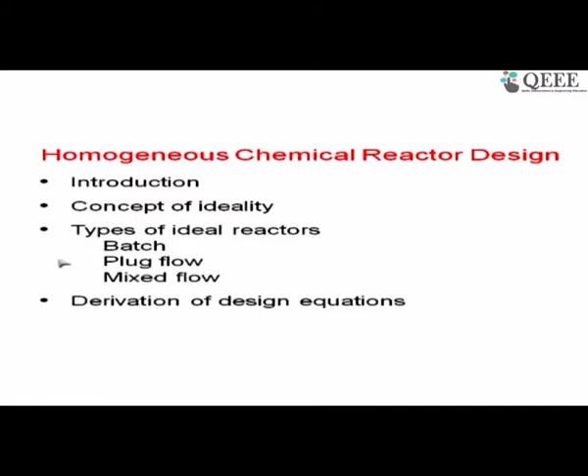Introduction first, and we also have three ideal reactors. After understanding the ideal, what is the ideality, and then the derivation of the equations, and later we will also try to solve some problems. Okay, so now.

To start with, I would like to ask this question: what do we do as chemical engineers? We enhance the quality of this planet. How do you do this? What do you mean by enhancing the quality of the planet?

Enhancing the quality of the planet means your daily life is much better once the chemical engineers start supplying the materials. For example, early morning you have toothpaste, toothbrush, and also soaps, and the books what you are going to use, the dress what you have, textiles. Textiles is not 100% cotton, but most of the textile, the dress what you are using, some part is plastic. So polymers and all that.

That's why our quality of life is increased because of various chemicals produced by chemical engineers. For example, petrol, when you want to come by your two-wheeler, or your car, or even cycle, where the tubes are made by chemical engineers. So we increase the quality of life on this planet through medicines, through cosmetics, through your textile dress, and we now have beautiful shoes like Reebok shoes or Nike shoes. All these are produced by chemical engineers.

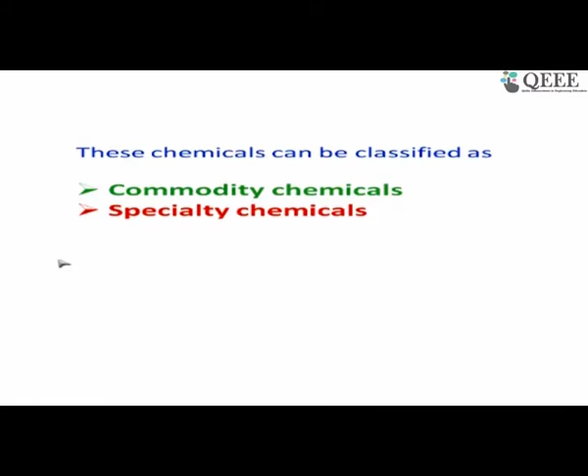Now if you see all those chemicals what we are talking, these chemicals can be split or divided into two categories: commodity chemicals and specialty chemicals. I think most of you would have completed this course called chemical technology. In chemical technology course, we teach you how to produce various chemicals. So in chemical technology, we can divide those chemicals as commodity chemicals and specialty chemicals.

Commodity chemicals are relatively simple molecules, like for example sulfuric acid, made by chemical transformations on a massive scale, producing at the lowest possible cost. The cost of production, the cost of the chemical is cheap. We produce in large quantities. These are also called bulk chemicals, bulk in large scale, and that is why probably the cost is reduced.

And we have specialty chemicals, where the volume is very small, but the cost is very high. This already you have seen. Those who are using some kind of cosmetics and deodorants and all that, you may have only 10 ml of deodorant or the sprays, but that may be costing 200-300 rupees. It may be 10 ml or 20 ml or 30 ml. So this kind of low volume but very costly chemicals are called specialty chemicals.

Like for example, drugs, injections. Sometimes an injection, a life-saving injection, may be only 3 milliliters, a very small quantity, but that may be costing 30,000, 50,000, even 1 lakh rupees. These are the specialty chemicals what we are producing. So as chemical engineers, you have to learn how to produce chemicals on a very large scale, and also you have to learn how to produce these chemicals on a very small scale.

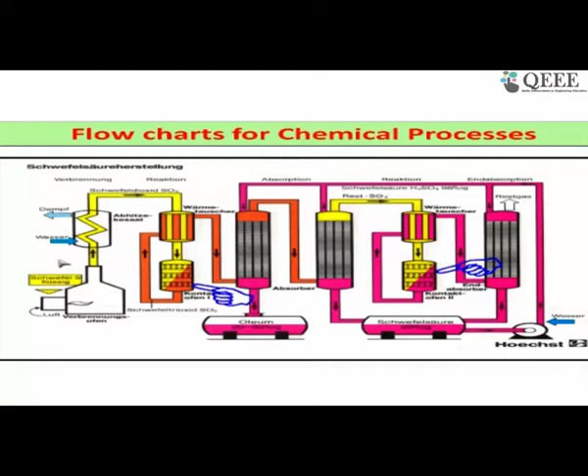For example, there is one there like this. That is one of the reactors. We call that a packed bed reactor. This is a sulfuric acid plant.

Of course, I am sorry it is in the German language, but anyway it does not matter. How do you produce sulfuric acid? Sulfuric acid is produced by taking sulfur first and then oxidizing that. Sulfur plus oxygen gives us sulfur dioxide. Now this sulfur dioxide is converted to sulfur trioxide. Again the reaction is SO2 plus half O2 giving me SO3.

But the difference now is sulfur is burnt in oxygen to give sulfur dioxide, while sulfur dioxide to sulfur trioxide is a catalytic reaction. Both are chemical reactions. The first one is sulfur plus O2 giving us SO2. The second reaction is SO2 plus half O2 giving us SO3, using a catalyst, and I am sure you may know what this catalyst is. This catalyst is vanadium pentoxide.

So now the design for converting SO2 to SO3 using O2 is different compared to simply burning sulfur in a reactor. That is also a chemical reactor, and this is also a chemical reactor.

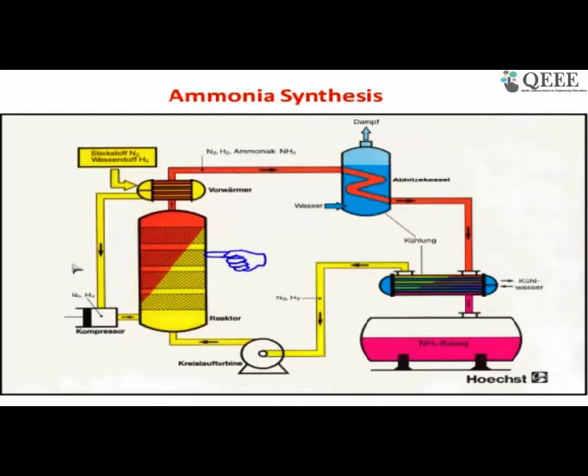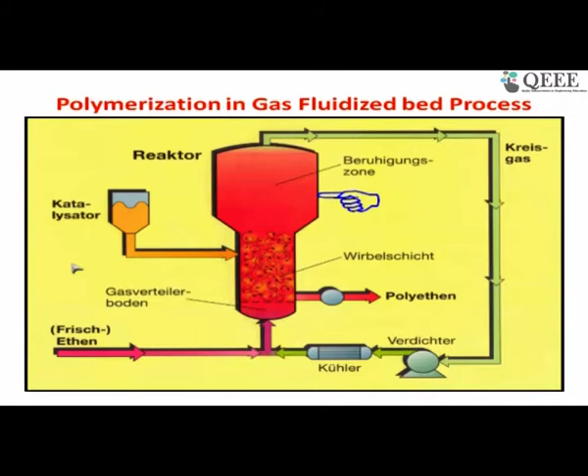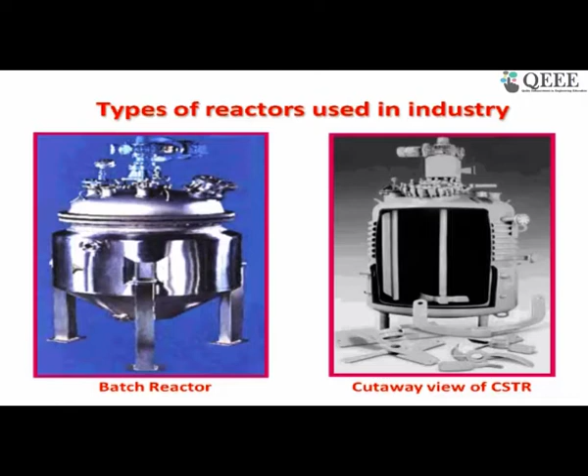Now these are typical photographs of reactors. The first one is the batch reactor, and the other one is what we call CSTR, that is continuously stirred tank reactor. These are used very widely in industry, particularly for liquid phase reactions. Only if you have a liquid reaction taking place.

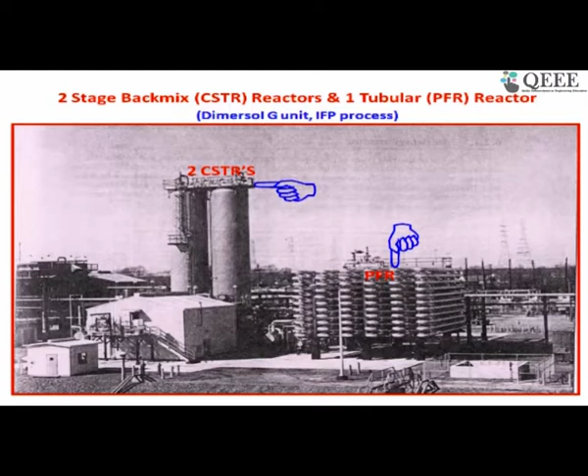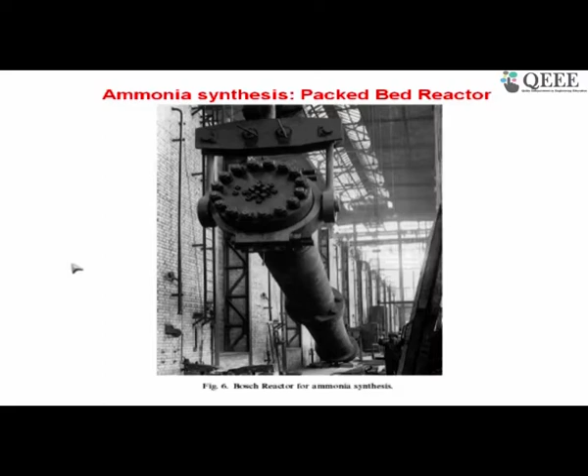This is the ammonia reactor. So this information I am taking from Levenspiel. Normally I follow the Levenspiel book, which is one of the excellent books. I think most of your teachers also will know about this book, right? So follow this book and understand it. There are many other books, but this is very popular. The reason is the subject is explained in a beautiful, very simple manner. So I follow this book, and that's why I have taken all these pictures I am showing you from this book.

So if you have any doubts, you can go to that book and try to find out. If you are not able to understand, you can ask your teachers. Still, if you are not able to get satisfactory answers, you can try me. I may give or may not give an answer, because none of us knows 100% of everything. But we will attempt to definitely address it if it is a very good question. So any question you can ask, it's not that only very good questions you have to ask.

Good. So now these are the various kinds of reactors I am showing here. Those are all catalytic reactors, because there you can see some kind of solid particles, and most of the time when we are talking about catalytic reactions, they involve solid particles. So that is the reason why all those things are solid. For example, the first one is a packed bed reactor, and B also is a packed bed reactor.

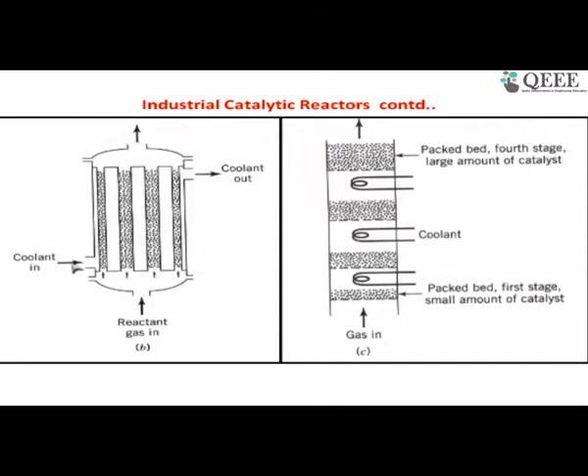But here is the problem — I hope you know what a catalytic reaction is, and there are also what are called non-catalytic reactions. For example, carbon burning, carbon plus oxygen giving carbon dioxide, is a non-catalytic reaction. I hope you know the definition of catalyst: a catalyst is a substance that will only participate in the reaction but not react itself. It will not change its composition and will not disappear. It will be there all the time if there is no deactivation. That is the definition of a catalyst, and most of the time we have only solid catalysts.

So this covers only catalytic reactors, and non-catalytic reactors can also be designed the same way as catalytic reactors, with slight modification.

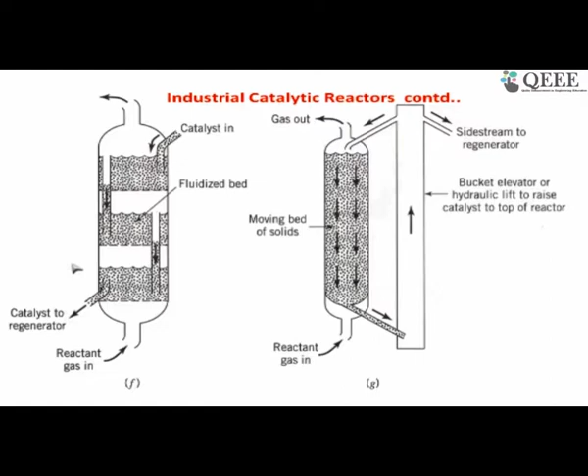What I am giving you is a small portion of reactor design, used for catalytic reactions, non-catalytic reactions, and also homogeneous reactions. These are gas, liquid, solid reactions - gas is one reactant, liquid is one reactant, and solid can be a catalyst. There are 3 phases now. These are the various designs useful for the reactions. You may be thinking I am showing too many things, but it is only to appreciate that there are so many varieties of reactors.

That is why I am showing you that. You do not have to remember all that, but it is better to know that there are various kinds of reactors available in the chemical industry. So now I can show you some more.

Gas bubbles, as you would see in aquariums in shopping malls or in your own house when you put fish and bubble oxygen because fish also need oxygen - what you see there is bubbles coming. In chemical reaction engineering, those bubbles are one reactant and liquid is another reactant. The gas in the bubble has to react with the liquid, and how the reaction takes place, what steps are required for the gas to go into the liquid and then react, is the study of chemical reaction engineering.

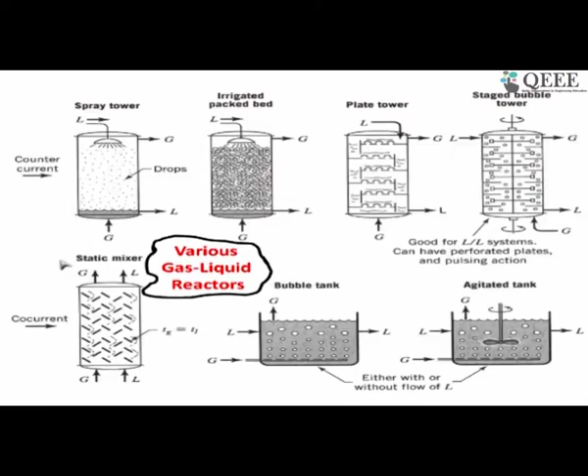That is why you have to remember that because we have gas, liquid, and solid phases, combinations of all these phases will give us lots of information and lots of varieties of reactor designs. I don't say the design is simple, but reactors, right? So that is what I was trying to show you here, and some more.

By the way, the title 'chemical reaction engineering' itself is one of the wonderful titles, because you are engineering a chemical reaction. That is the difference between a chemist and a chemical engineer. A chemist will not engineer a chemical reaction.

He will simply conduct a chemical reaction in a very small test tube. He will take maybe 5 grams, sometimes 1 gram of reactant, put it into the test tube, go to the Bunsen burner, and put the test tube on the burner. Why? Because unless you increase the temperature, the reaction doesn't take place. So that is why you go to the Bunsen burner and then shake it - that shaking is to make the reaction mixture homogeneous. That's all, and the reaction takes place. He gets a product, goes to some analytical equipment like liquid chromatograph, gas chromatograph, or simply uses a titration method, and finally says yes, I got the product. What is the total amount of product? Not more than 2 or 3 grams.

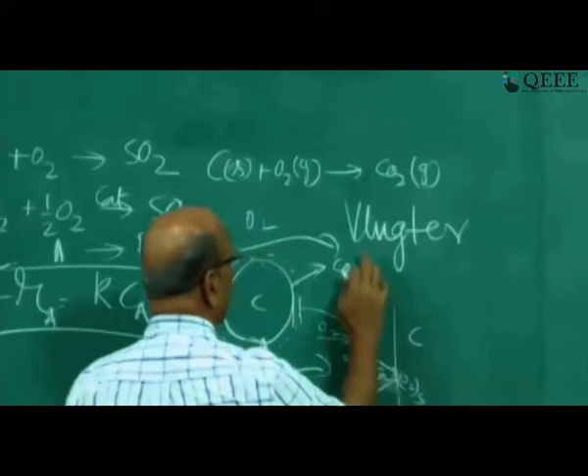It was beautifully coined by a person called Vlugter - I hope that's the name, Vlugter. He is the person who introduced the name chemical reaction engineering, and immediately that idea was taken by Levenspiel, who used the same name as his textbook title, Chemical Reaction Engineering. You are engineering a chemical reaction.

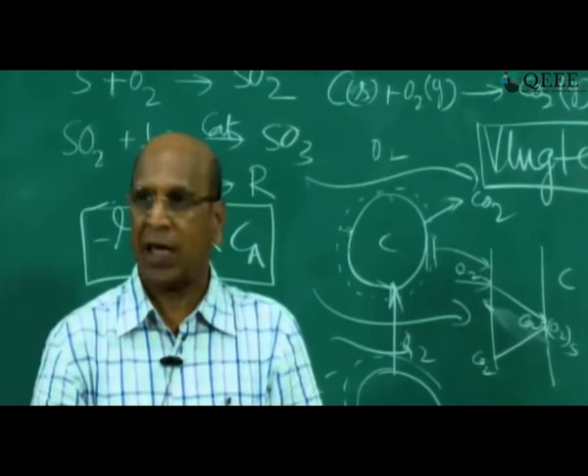I am sure most of you would have studied mass transfer, where you use Fick's law of diffusion. Here also we use Fick's law, or otherwise there is another law of mass transfer, the convective mass transfer, because it is flowing and then coming there - it is not simply diffusing. So that is the reason we have this mass transfer step, which comes under the physical step. That is the meaning of the physical step in kinetics. The chemical step is the actual chemical reaction.

So now let me say a few words about input. What do you mean by this input? I told you that when producing sulfuric acid - that is the flow chart I showed you first - let me go back and show you. When we were talking about the sulfuric acid plant, I told you someone has to specify that you produce 5,000 tons per day of sulfuric acid. I have also given here the steps required for sulfuric acid: this is SO3, and now this SO3 plus H2O giving me H2SO4.

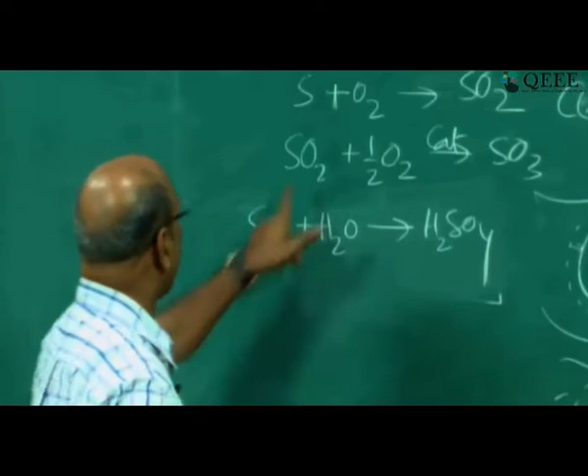This is H2SO4. So now what we have to do is, what is the input? How much of SO3 I have to send and how much of H2O I have to send, that is the input. If I am talking about SO2 plus half O2, how much SO2 I have to send, because this is the reactor. And when I am talking about this reactor, how much of sulfur I have to take and how much of oxygen I have to take. That is the input in that picture.

So that is the reason why we have this input, which is known to you. Input is the simplest one to get. I will give you another example.

Let us say that during rainy season many people may get fever. Throughout India now we have rains going on, so they may get fever, and you have to produce more fever drugs, fever medicines. People quickly count that there are so many patients, maybe 1 lakh patients. Each patient has to take 500 milligrams per day of the tablets. So now you can calculate how many milligrams for 1 lakh people, and you go to the stoichiometric equation and find out from the stoichiometry what is the reactant that is possible.

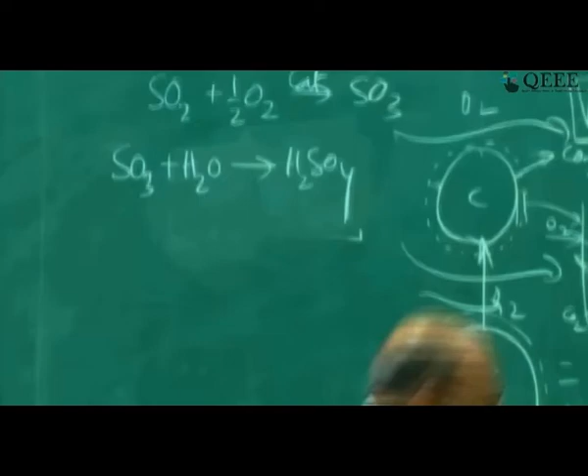This is what exactly you studied in your process calculations course. Some universities may call this process calculations course as material and energy balances course. In that course itself we tell you how to calculate the reactant if the product is given. The product here is sulfuric acid, H2SO4. So how much of SO3 is required? And to have this SO3, how much sulfur dioxide is required? And to have this SO2, how much sulfur is required? These are all the calculations you do in your process calculations.

You see how beautifully all the subjects fit into the entire chemical engineering curriculum, and everything starts with the reactor. So reactor is the first equipment that should be designed in actual industry, but this is the one we teach normally at the end, maybe in 3rd year, before you close. The reason is you have to understand fluid mechanics, thermodynamics, process calculations and heat transfer, all these subjects are required for the design of reactor. That is why we start with process calculations, then thermodynamics, fluid mechanics, heat transfer, mass transfer, and then go to chemical reaction engineering. I think now you can get the overall picture of the entire syllabus, even though in industry the reactor is the starting equipment. That's all, period.

Good, okay, so now this kinetics part. Input is easily seen for us because we can calculate knowing that you have to produce maybe 1000 tons per day or 2000 tons per day. So now input is already known in that output equals input equation. Input I know, kinetics now you have to find out.

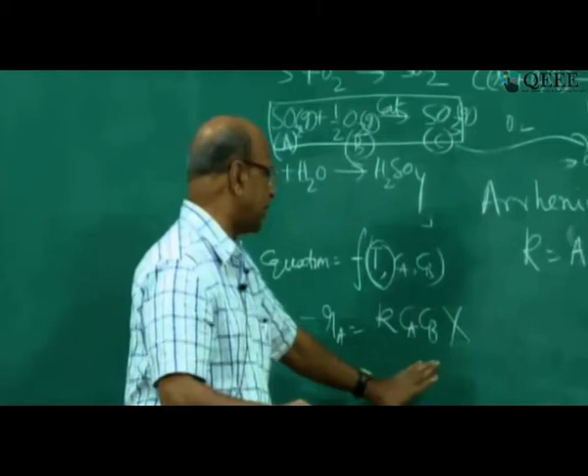Once you understand the concept, then it is only a mathematical exercise. That's why you have math 1, math 2, math 3, math 4 and so on in your BTech curriculum - so many mathematics courses, that is the reason. So mathematics will come automatically later, but before that, to teach the concept, we take the simplest reaction, maybe first order, maybe second order - and this is what we call second order.

So now, when we talk about the second part - in that equation, in that box, output equals input, kinetics and contacting. Input I have already explained, that comes from the material balance and the actual demand, how much you have to produce. And kinetics comes from the rate equation, which you have to develop.

And developing the kinetic expression itself is a big thing. I think your teachers will tell you once these lectures are completed, your teacher will start - or some of the teachers would have already started, since your college would have started earlier. So that kinetic part, some of you may be knowing and some of you may not be knowing.

So what I request of all the teachers is to give that connection between kinetics and the input and contacting. I will explain how these three pieces of information - input, kinetics, and contacting - together give the final expression for the design. My portion is only that contacting part.

Once you take the contacting part, how do I design? But before that, what we require is kinetics and input. This is what I would like to request all the teachers to give - that connection, so that the students are not lost. They hear a professor from IIT talk, but they don't know where to put that information in their overall reaction engineering problems, right?

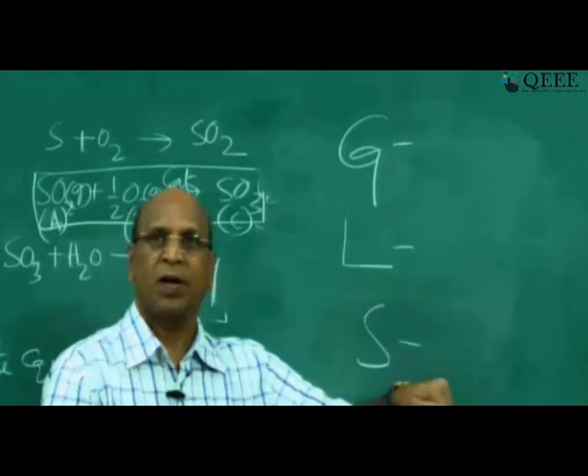Now there are combinations. When you have two reactants, I may have gas and liquid, liquid and solid, solid and gas. I may have solid and solid also, liquid and liquid also. But when I say liquid and liquid, both are not miscible - like kerosene, if you put oil in water, oil is separate and water is separate, it will float depending on the density. So that is also a two-phase liquid phase reaction.

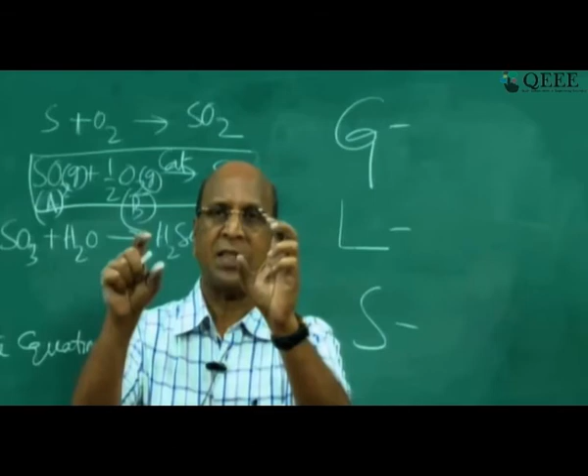Normally what I do when I teach my students is give an exercise for each of the heterogeneous reaction categories. There are 6 categories - gas-liquid, gas-solid, etc. In each one, 5 industrial examples of chemical reactions. Like if you take gas-solid, there are many.

One gas-solid reaction example is coal combustion, coal gasification, or iron ore reduction. Iron ore is also a metallurgical reaction, but it's a gas-solid non-catalytic reaction. This is a very good exercise. I request all faculty members to give this exercise, at least 3 to 5 examples in each category. The student has to go to the library, collect that information, so that he or she will feel that yes, there are so many kinds of chemical reactions possible.

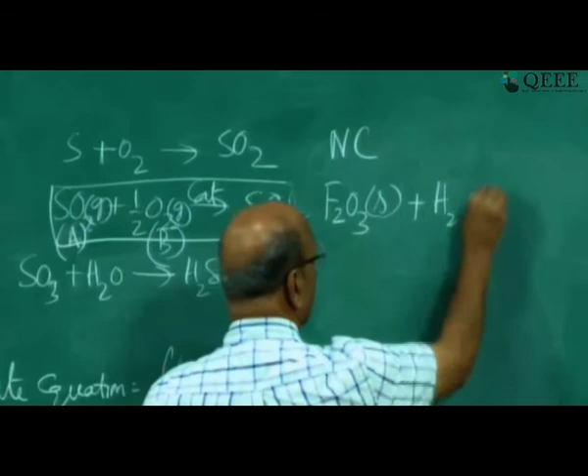Good. So I have also told you there are catalytic reactions and non-catalytic reactions. The difference, I think I will give you an example. Examples are always better. So if I give you a non-catalytic example, I have Fe2O3 solid plus H2 gas giving me Fe solid plus H2O gas.

Why is this a non-catalytic reaction? The reason is Fe2O3 after the reaction is not Fe2O3, it is Fe, a different compound, right? This is a solid, this is a gas, and we call this a gas-solid non-catalytic reaction because there is no catalyst here.

Now let us see: I have H2 gas plus N2 gas plus Fe, this is solid. So now I am writing below: this is NH3 gas, this is ammonia, and the catalyst is iron, plus this is Fe solid. So when I balance, this will be 3, this will be 2. So this is the balance, but now you see Fe started as Fe because it is a catalyst, and after the reaction is over, it is still a catalyst, still Fe.

That is the difference. This is called a gas-solid catalytic reaction, and this is called a non-catalytic reaction. I have not expanded on it, but this is the main difference between catalytic and non-catalytic reactions.

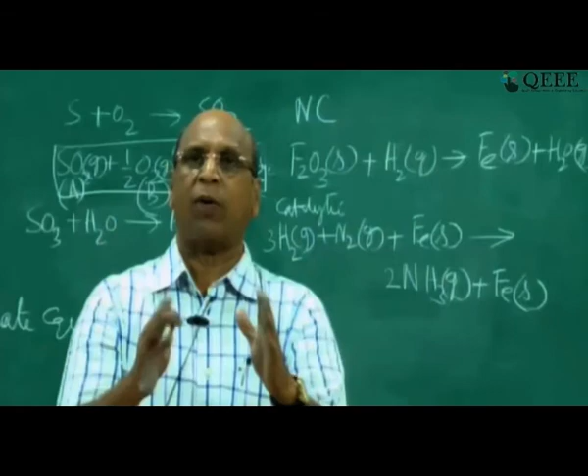So now I hope you got some idea about this. For every category here, for gas-liquid reactions if it is heterogeneous, gas-solid reactions, all categories, or in terms of homogeneous liquid and gas, you have to develop a rate expression. That rate expression is simply a rate equation as a function of temperature and concentrations, but this is for homogeneous.

This is for homogeneous. For heterogeneous, there are 2 more steps coming. This is only concentration and temperature, at high temperature. So there you have to let the mass transfer step come into picture.

Mass transfer from the gas to solid, temperature from gas to solid. You should have studied in fluid heat transfer how to calculate the heat flux through film, through gas film. Heat flux, I hope you understand flux.

Flux is any quantity per unit time per unit area. How much heat, how much energy transported per unit time, maybe per minute or per second, per meter square. That flux is required because once I know the flux, I can calculate the temperature.

So you have the normal Fourier law of heat transfer and also convective heat transfer and all that. So those equations will automatically come there with the heat transfer coefficients, thermal conductivity and mass transfer coefficients and diffusivity. And all of you also know the connection between diffusivity and mass transfer coefficient from film theory. So that is why in reaction engineering, all these subjects are also integrated. They have to be integrated, there is no choice.

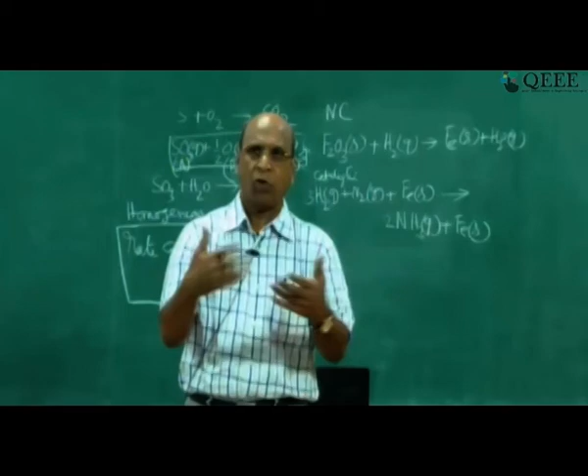So this minus RA is K into CA CB. The definition also I will show you sometime later. Normally the rate equation is expressed as moles of A converted per unit time per unit volume. Those who have completed the first introduction in your normal course would already know the definition of rate. It is very nicely given in this book, in the first chapter, what are the various kinds of rates and how do you define them.

What I want to teach now is only the homogeneous part, where the definition is - if I have A plus B going to R, then the rate minus RA is defined as minus 1 by V, dNA by dt.

This minus is for the reactants because reactant concentration is decreasing. So this is written as moles of A reacted per unit time per unit volume. Normally what we write is moles per minute, one example, per liter. So moles reacted per minute per liter of the reactor. It can be per meter cubed of the reactor, whatever you like. So that is the definition, and this simply tells that we have so many moles reacted per unit time per unit volume.

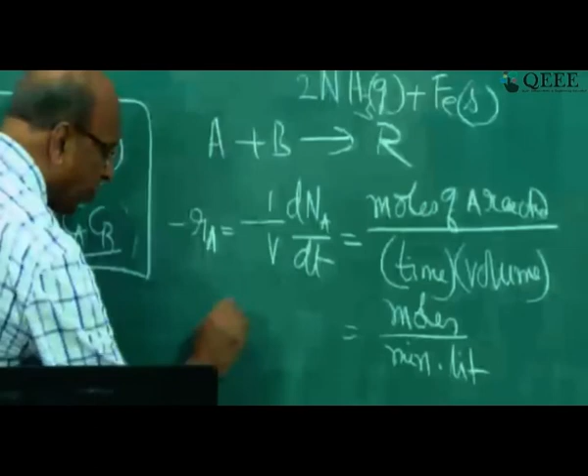Now this entire thing may be equal to a simple first order reaction, K into C. That's all. How do you get this one, K into Ca? You have to do experiments, you have to go to laboratory, you have to conduct experiments, and there are some procedures, processes, some methods to develop these rate expressions.

And that is the first part of what we normally teach in chemical reaction engineering, but I am only just giving the connection, not the details of how you actually find out the rate equation. I am sure most of you would have found this rate equation in your high school physical chemistry, maybe 11th or 12th class. You should have studied in physical chemistry laboratory to find out order of reaction. They would have given a simple example to find out what is the rate expression. That rate expression is very important for us in reactor design.

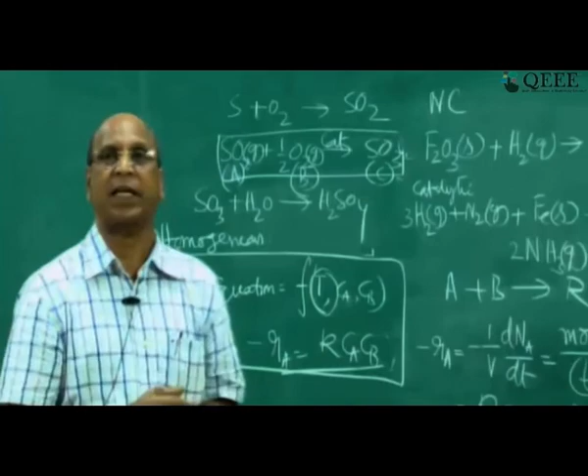Good, so now let me go back to this, what I have just written. Definition of homogeneous rate - that I can be A, that I can be even for the product. Normally what we do is, if it is a product R, then product is being formed, so it is positive. That is the convention. And when you are writing the rate expression with respect to reactants, then you have the negative, because it is decreasing with time, otherwise there is no reaction.

You take so many moles of A, so after 5 minutes, if you start with 10 moles per liter, that has to become 5 moles, 1 mole, 0.1 mole, and finally everything converted or about to convert. That is why there's a minus sign there, right. So this is a very general definition of homogeneous rate. Moles of I formed means for product, the same thing can be written as moles of I reacted for the reactants. Normally what we take there is a key reactant.

What is a key reactant? You should have studied this in high school also. A key reactant is the one which has the lowest number of moles in that stoichiometric equation.

For example, in A plus B going to R, stoichiometry tells me 1 mole of A plus 1 mole of B gives 1 mole of R. But I may take 10 moles of A and only 0.5 moles of B. Now B is the key reactant because that is the lowest quantity. After 0.5 moles of B is reacted, the reaction cannot take place even though I have a lot of A. That is the key reactant.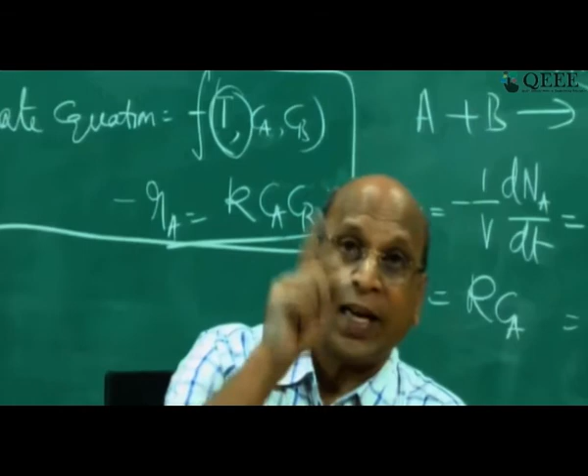So the rate expression minus RA is always for a key reactant, whichever is the limiting reactant.

I have also given just below the homogeneous rate, where the rate is expressed as moles per meter cubed per second. One term is temperature, the other is concentration dependent. Once we have the concentration dependent term, the equation can be like this: minus RA equal to K Ca to the power of A, where A is what we call the order of reaction.

Now this K can also be expanded in terms of the Arrhenius equation. I hope you remember what the Arrhenius equation is. K naught e to the power minus E by RT is the Arrhenius equation, where E represents the activation energy, K naught gives the frequency factor or pre-exponential factor, and Ca is the concentration dependent term.

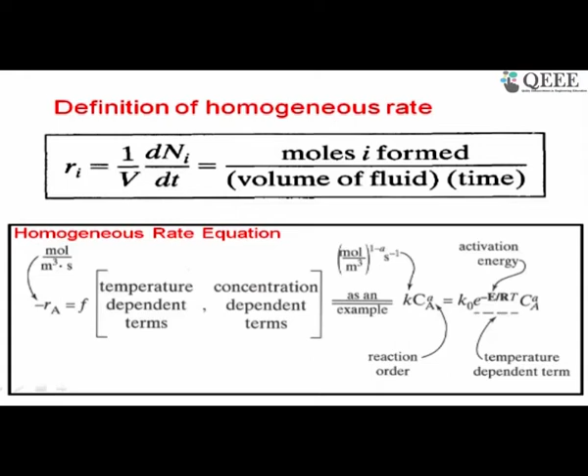So now with this combination, what kind of rate expressions are possible I have given here. If I take only A going to R, just A going to R, you can see all those equations which I have given below are possible.

That is why you have to appreciate here: if I ask you what is the order of reaction for A plus B going to R, with high school knowledge your answer would be, sir, it is a second order reaction.

If I ask you A going to R, what is the order of reaction? Your answer would immediately be, sir, that is the first order reaction. No, that is wrong. You can never tell what the order of reaction is just by looking at the stoichiometric equation. That is number one thing you have to learn in chemical reaction engineering.

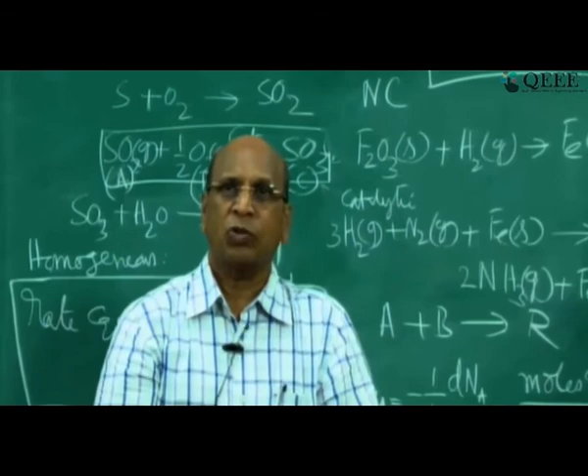It is exactly like you cannot say whether a person is good or bad by looking at their face, right. All of us know about that. So that is why even though it looks very innocent, A going to R, very simple, it may give you hell. It is not that easy to tell that this is the first order reaction.

Then what do you do? You don't have any other choice except going to the laboratory and trying to find out the actual order of reaction. There are methods, I told you. There are some reactors, and then there is some methodology to find out the order of reaction.

Once you know the order of reaction, if it is first order, then you write: this is first order reaction, my minus RA equal to K into Ca. Then you are very happy. Once you know experimentally, you have proved that this is first order reaction, then if someone asks you what is this order, you can say yes, it is first order, sir.

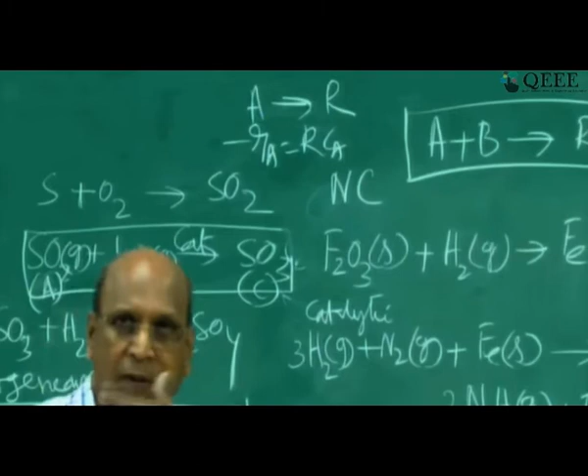How do you know? I will ask, or the other person can ask. Because you have done the experiment, sir, I have proved it with experiment, it is first order reaction. So those are called elementary reactions, where the stoichiometric coefficient and the order of reaction, the power, correspond. Those are called elementary reactions.

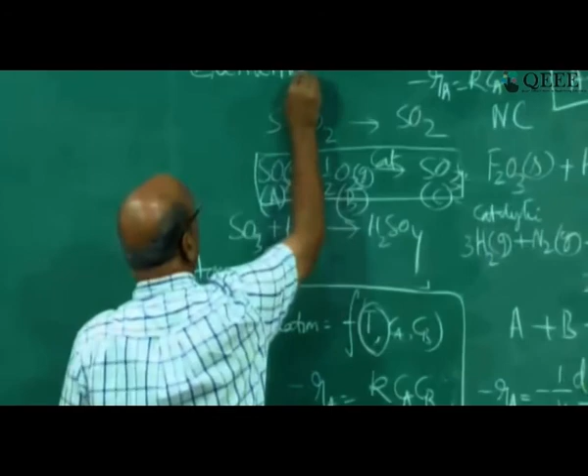And elementary reactions - I am sure your teachers would have taught you if they have already started reaction engineering course, because reactor design comes a little bit later, maybe 2 or 3 weeks later. Right? So elementary reactions, non-elementary reactions.

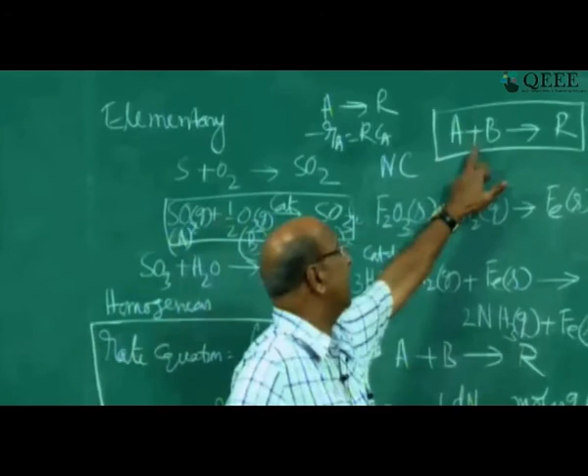Non-elementary means you can never tell what is the order of reaction by looking at the stoichiometric equation. By looking at it, if this is an elementary reaction, this is a second order reaction: A plus B going to R.

So there are so many possibilities for the reaction rate equations, and all those possibilities I have given there. The possibilities are minus Ra can be zero order reaction. If you see A going to R, it can be first order reaction, it can be second order reaction, it can simply be nth order reaction where n can be 0.5, 1.2, or 2.2, but never beyond 3.

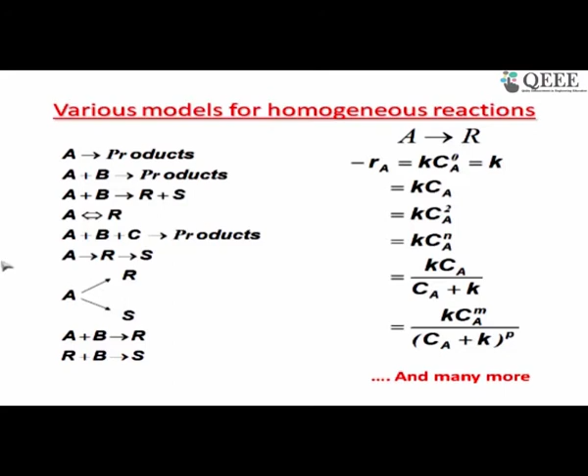So that is why you may also have KCa by Ca plus K - all combinations are possible. So please do not have a fixed idea that A going to R should only be a first order reaction. Open your mind, and then try to find out what is the order of reaction only from experiments. As chemical engineers, you can never avoid experiments, even though you want to, if you want to be in chemical engineering, particularly chemical reaction engineering.

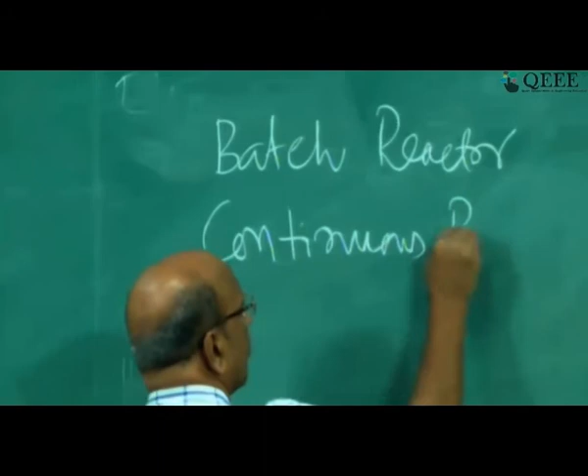But fortunately, all those wonderful pictures you have seen can be reduced to only 3 types of reactors. Only 3 types. Let me write that: the 3 types of ideal reactors will be batch reactor, and continuous reactors. In continuous reactors, you again have 2: one is plug flow reactor, the other one is mixed flow reactor.

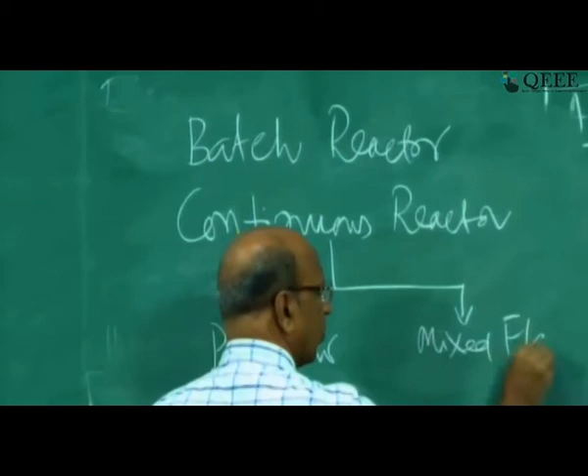So what I am going to talk about is what is a batch reactor, what is a plug flow reactor, and what is a mixed flow reactor, and how do you design it.

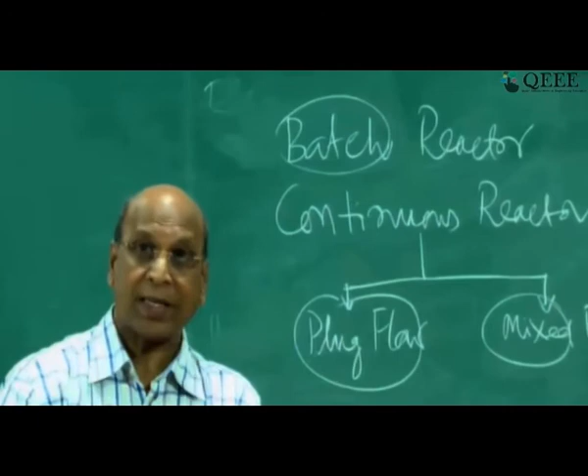This is all for either gas only, or whether you have liquid. But the equations we are going to derive will be universally acceptable even for heterogeneous reactions, absolutely no problem - same equations. But what is the difference? The difference will be in the rate equation, which will be in terms of mass transfer and heat transfer.

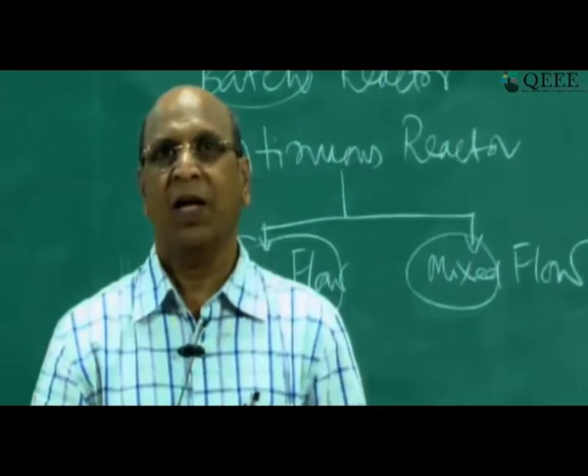Whereas in homogeneous reactions, it will be simply K into C, or any complicated equation, but you will have a concentration term and a temperature dependent term. There you have mass transfer coefficients and heat transfer coefficients - that is the extra information, but the reactor design is exactly the same as what we are going to talk about for homogeneous reactions.

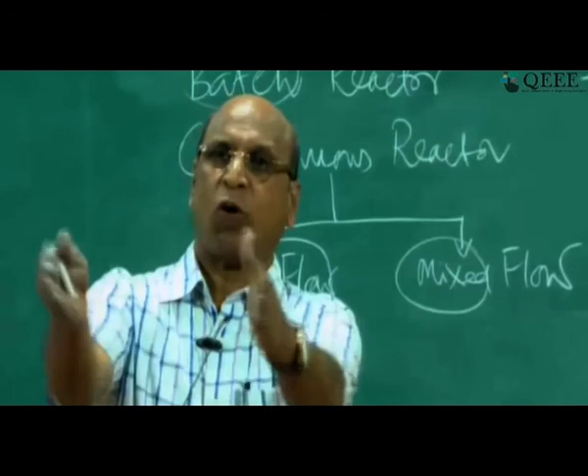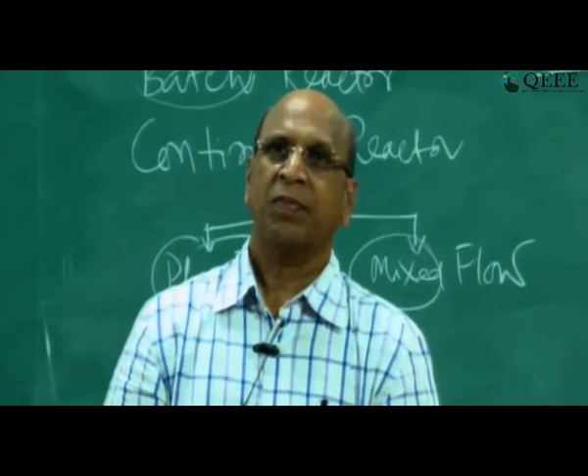Why do we use small reactors for high speed reactions? The design expression, once we derive it, you will know that.

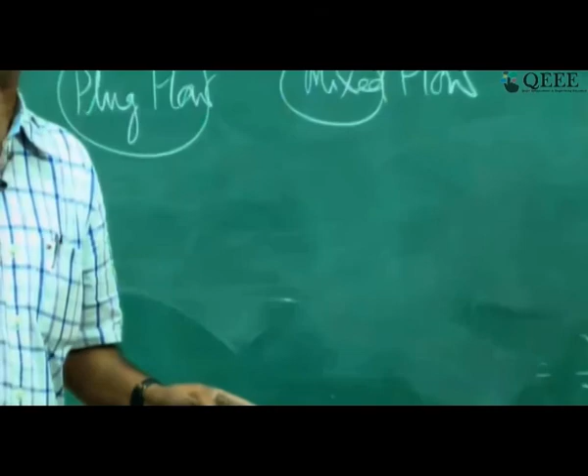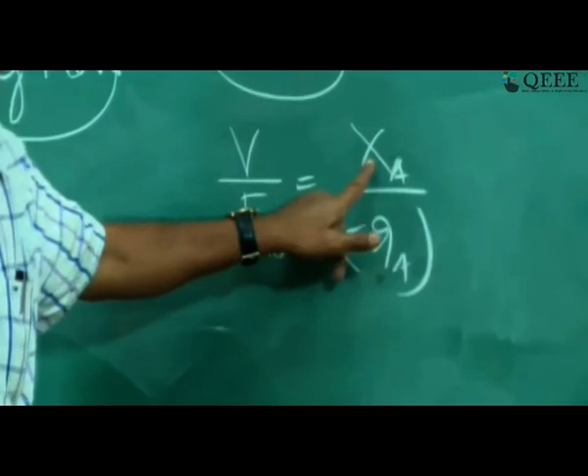Okay, I think I will just write it, even without deriving. So one of the design expressions for, let us say, this mixed flow reactor is V by Fa naught equal to Xa by minus Ra. This minus Ra is the rate equation, and this X is the conversion you want, 90% for example, and Fa naught is the amount you are sending in. Input is this, kinetics is this, and this is what you have to get - 90% conversion. To get 90% conversion, you have to calculate the volume.

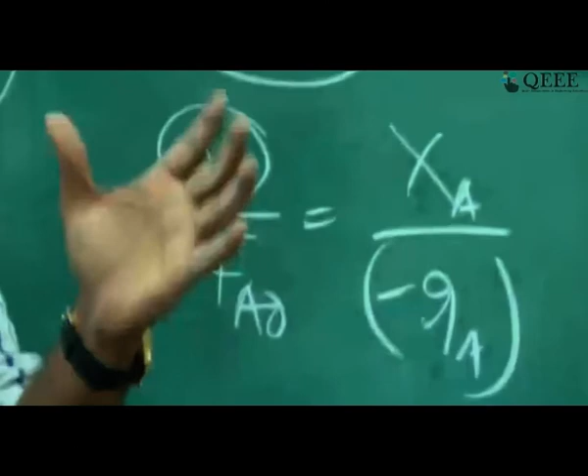So this is fixed for 90% because you want 90% conversion, Fa naught is how much you are inputting into the reactor, and now minus Ra - if minus Ra is a very large value, mathematically you are dividing by a large value so this side becomes small, and volume becomes small because Fa naught is fixed. So that is why when you have very fast reactions, the rate is very high, the volume required is small.

So when you have a large rate value, naturally you will have a small reactor. On the other hand, if this is a very slow reaction, that means you are converting 0.00001 moles per meter cube per minute, a very small quantity. So that is why you need more time or more volume for getting the same conversion. That's why volume increases. It depends on the rate, how quick it is. If you have a very fast reaction or very high rate, that's why you get a small volume.

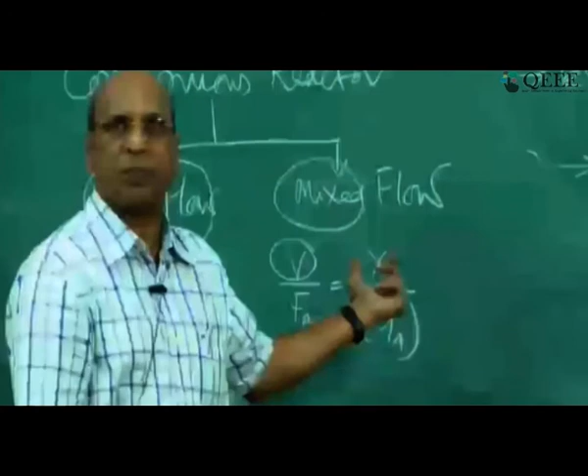And you know, for catalytic reactions, the catalytic rate is very fast compared to the normal rate. That's why you are using a catalyst, right? So when you use a catalyst, your volume may decrease a lot.

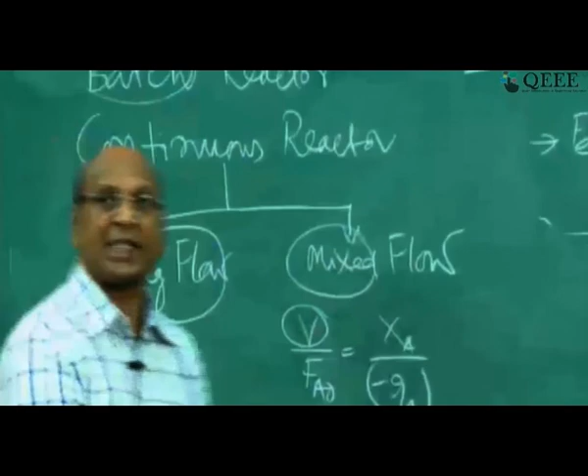And that comes from the derivation where you have this kind of equation, and whatever reactor type you take, maybe plug flow, maybe mixed flow, maybe batch reactor, in all these three the rate comes in the denominator. When the denominator is large, this side you have low values, so that's why volume becomes low or time becomes low.

Right? Understood, or do you still have some doubt? Sir, understood. Thank you, sir.

Another question: how does the shape of a reactor influence a particular reaction? In fact, there is no connection between a particular reaction and the shape of the reactor.

Absolutely, you cannot say if I have second order, you take a globe shape, and if you take first order, you take a tube shape. No, absolutely there is no connection. But when I start explaining to you what reactor design is, definitely I will tell you there are only tubular reactors and tank reactors, but why we take that shape, all that I will explain to you later. But please remove this doubt from your mind that the shape of the reactor and a particular reaction don't have any connection.

Whether you have a fluidized bed or packed bed depends on whether you have a catalyst or no catalyst. That I will explain to you later. So that is good. Is there any other question?

Okay, how to determine the frequency factor of the Arrhenius equation?

Very good. I think you have not done the physical chemistry experiment. I think you have to plot the Arrhenius equation on a semi-log sheet. See, your equation is K equal to K naught e power minus E by RT. This is the Arrhenius equation, which is valid most of the time in chemical reactions, no problem at all. So we can safely take that.

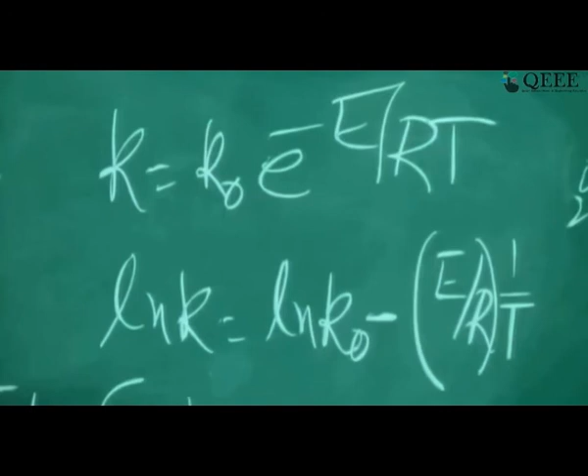So now take logarithms of this. Ln K equal to ln K naught minus E by RT. So I will take this one as E by R and this as 1 by T. So this can be plotted as ln K versus 1 by T. This is nothing but X, this is M.

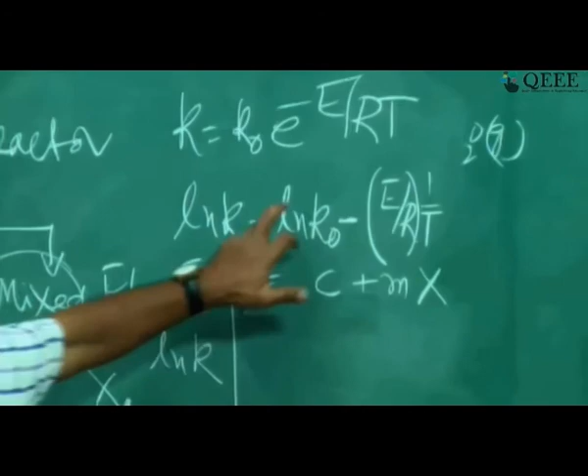This one, I am just writing plus, and then here you have C, and this is Y. I hope you recognize this equation now: Y equal to mx plus C. So we are converting this Arrhenius equation into a straight line on a semi-log graph.

So now ln K you plot against 1 by T, and you will get a line like this. So the slope m is E by R, negative slope, the minus will come anyway. And this intercept is C, which is ln K naught.

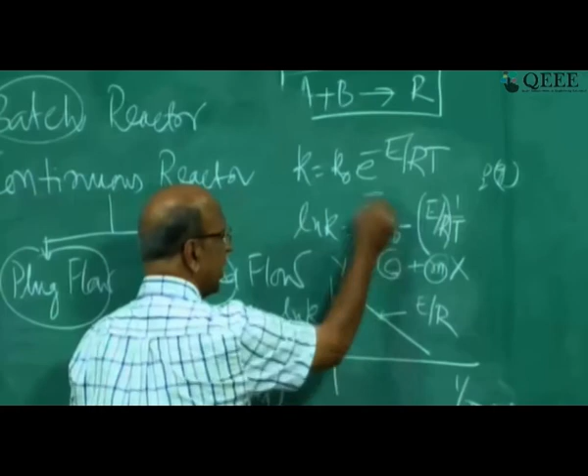This is ln K naught, from which you can calculate the frequency factor. This is how you have to do it: after taking the data for various temperatures, find the K value, and then you will get this plot.

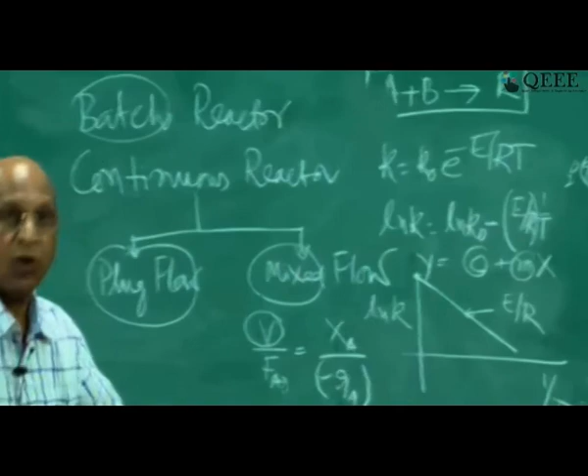I think that is a very good question. In the laboratory you do that to find out the frequency factor, and the slope will give you the activation energy, and anyway R we know, R is the gas constant. So you can happily determine that. I hope you understand that.

Okay, another question is there? Oh, BSAR, okay. BSAR has another question.

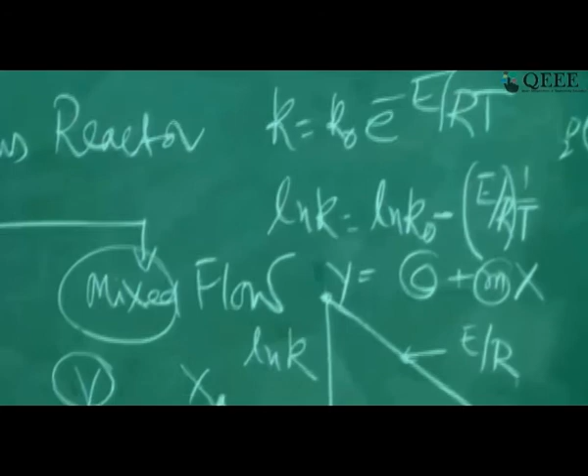When there are two separate phases, there exists a boundary layer. How do I visualize this layer and how to determine it? Yeah, again a very good question. Thank you, you are all listening and very active. Okay, so now I will give the simplest example, like you have water here.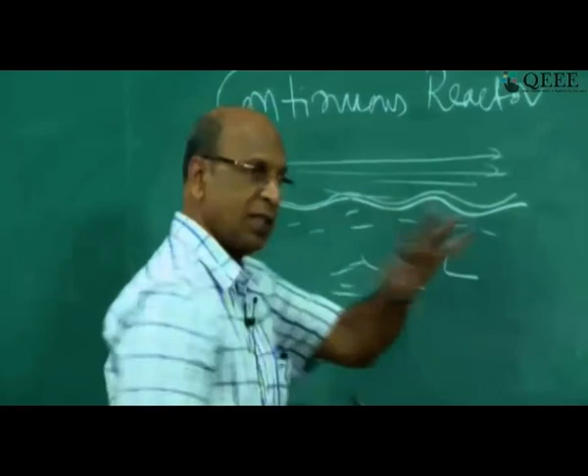This is the liquid phase and here we have the gas phase moving like this. So now this gas touches the surface. At this point the gas is also moving, and these molecules touching the surface of the water are supposed to be stagnant, dynamically moving, going and hitting and then coming out. When you look carefully, there will be some layer of molecules that always forms compared to the gas moving freely here.

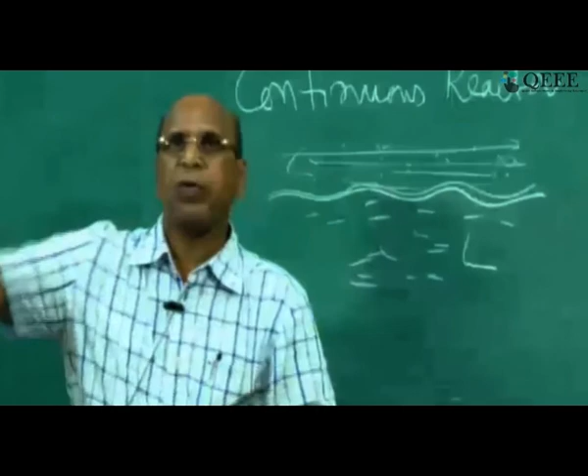This gas is moving much more freely, going out in the form of molecules. But sometimes, I've drawn a wavy surface, but if I take a straight surface like this, the gas molecules that are slow moving form a gas film something like this. One has to visualize this, and the most difficult part is how do I exactly calculate the thickness, or how do I measure it? It is not possible, right?

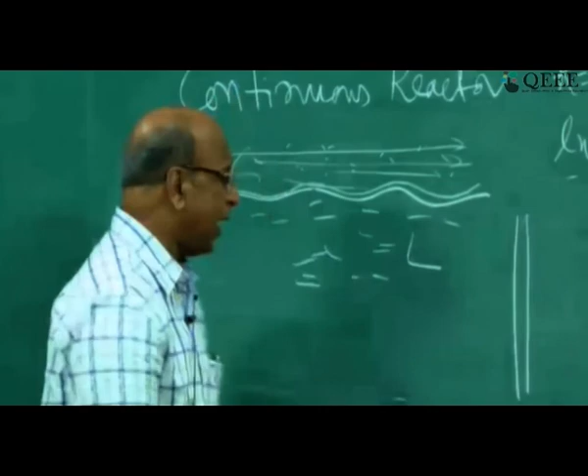I don't know if in fluid mechanics you were taught about the boundary layer. It's easy to imagine when I have a solid surface, and over this solid surface a fluid is flowing, either gas or liquid. This is a slightly complicated example, but the simplest is a solid surface over which we have liquid or gas flowing. The molecules on the surface, of that liquid or gas on the wall, are supposed to be sticky, stagnant. This is what is assumed in solving fluid mechanics problems, what is called the no slip condition.

That no slip condition automatically gives us an idea that there is a stagnant layer. The problem is, we have equations to calculate boundary layer thickness, but it is not that easy to determine it in practice. That is why we experimentally measure, and only then do we try to find out the mass transfer coefficient and heat transfer coefficient through the boundary layer. So that is the idea, and if you are not satisfied, you can always talk to me or send me a mail. I think that is a good question, because boundary layer cannot be exactly measured.

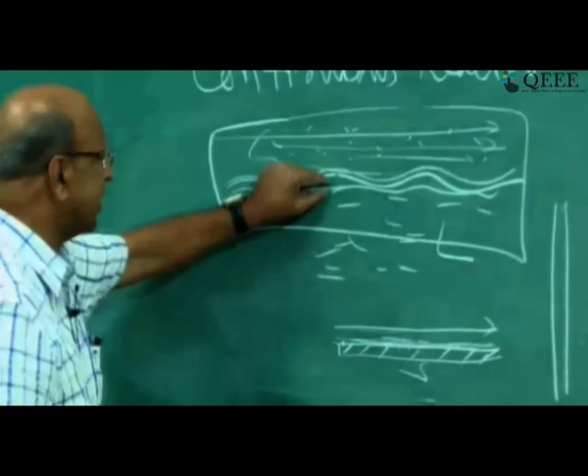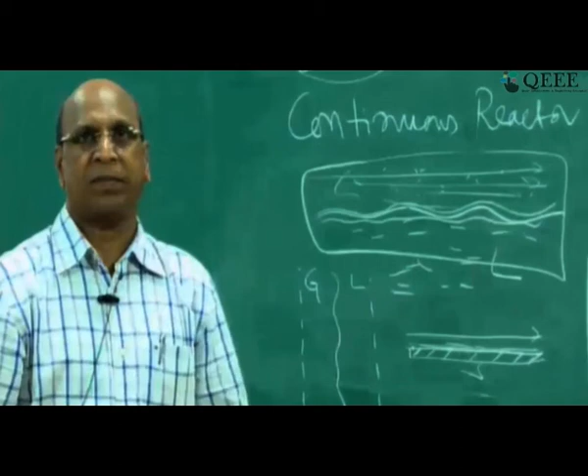Only visualization is possible: when you have two phases, the molecules very near the interface, if it is liquid, form a liquid film on this side and that side. That is why in gas absorption, the mass transfer chapter, we say we have the interface, this side liquid phase with a liquid film, and this side a gas film. Chemical engineering involves a lot of imagination and speculation, right? People imagined this, did experiments, and found that this model is consistent. That is why we call it the two film theory, one film on the gas side, another film on the liquid side. In reaction engineering also, we have to find out through this the amount of gas coming out, and through this the amount of the same reactant coming through. All of that we calculate from mass transfer coefficients. Very good, good questions.

So, is biochemical reaction homogeneous or heterogeneous? Good question. In biochemical reaction, if you take the microorganisms, they are not uniformly distributed in the liquid. So if you take microorganisms and the substrate separately, then it is a heterogeneous reaction. The reason is the microorganisms have to breathe oxygen, and this oxygen has to first dissolve in the substrate and then be transported to the microorganisms. So strictly speaking, the biochemical reaction is heterogeneous, because mass transfer comes into the picture automatically. But sometimes mass transfer is so fast that the assumption becomes homogeneous, because the oxygen is immediately dissolved in the liquid, taken up by the microorganisms, and immediately converts the substrate. So that can be taken as an approximation, but strictly speaking, when you take cells as well as liquid, it is heterogeneous, because mass transfer comes into the picture.

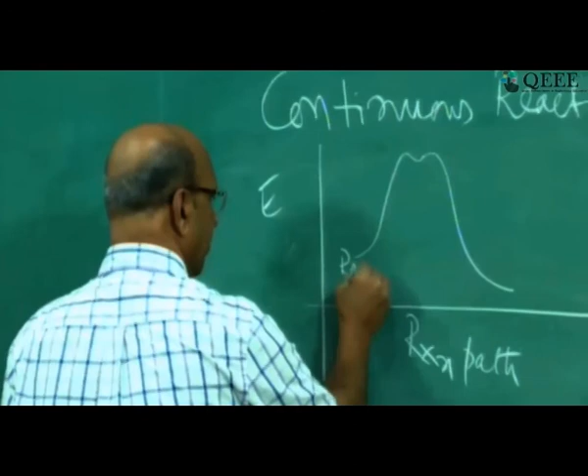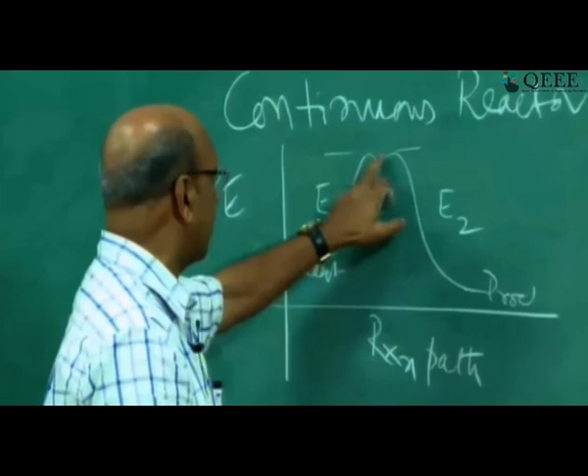This is reactants, this is products. So our activation energy E1, and this one is E2, which is also connected to our delta H, heat of reaction. The activation energy is what is required for the reaction to take place, and at this point forming the activated complex. There is activated complex theory, and another one, collision theory - two theories are there. So that activation required for the reaction to take place to form this activated complex is what we are talking about in terms of activation energy in the Arrhenius equation.

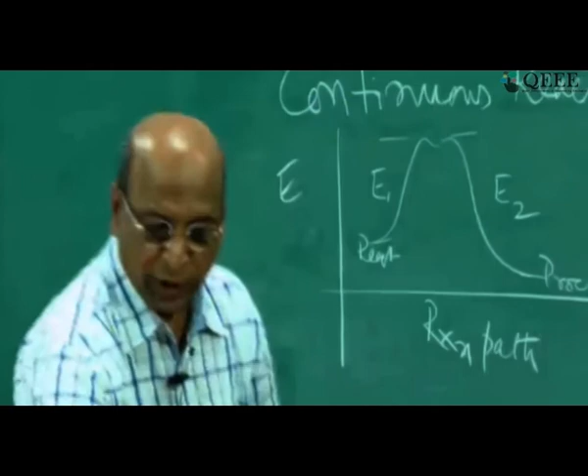This E1, E2 is also connected with activation energy, right. But I don't have thorough information to explain to you between delta H and E1, E2 and all that. So kindly ask your teachers, or if I can get some information later, you can send me a mail and I will reply.

Performance equation is used to determine the output as a function of input, kinetics, and contacting pattern. Can the same equation be used for all scales of reactors? Yeah, for any reactor there is no problem at all. All that information is required - input, kinetics, what kind of reactor you are talking about - is required to calculate what is the volume for a given conversion, or if volume is known, you calculate the conversion. So I will repeat, in reactor design, in one way it is very simple.

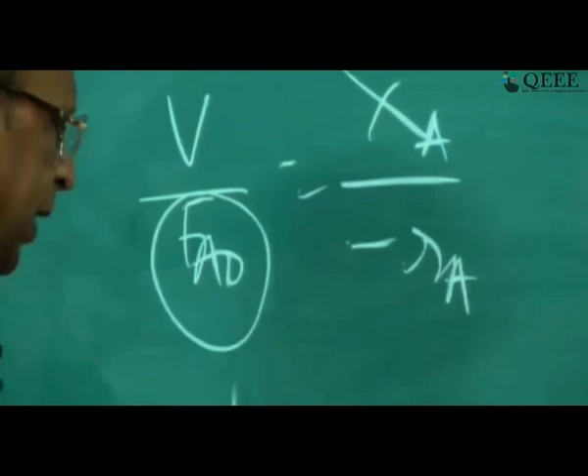If you look at the equation, V by Fa naught equals Xa by minus Ra. There are only 4 variables here. One variable I already know is Fa naught, that is the input - how many tons you are producing, converted to reactant Fa naught, so this I know already. Minus Ra I get from the stoichiometric equation, A plus B going to R, what kind of rate equation you get. So these two I have to find out. This is given by the demand of the plant, how much you have to produce, and now you have 2 variables known.

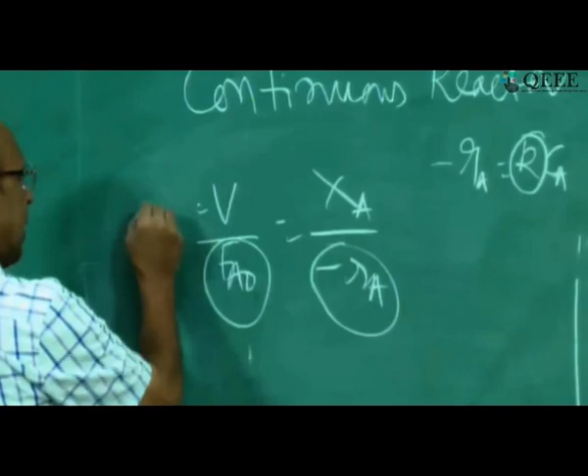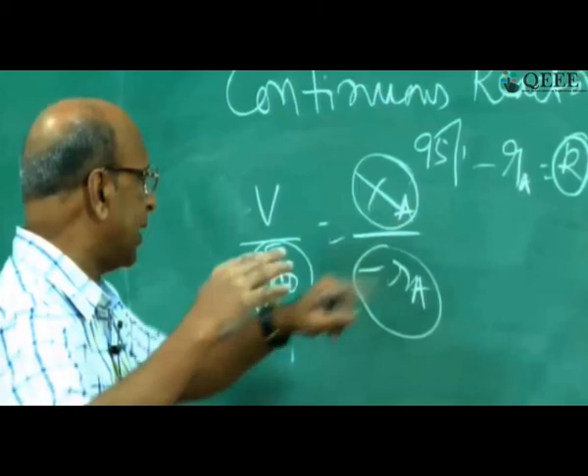If you have an old reactor already with you, say it is 10 meter cubed, you already calculated volume, you have that reactor, then you can calculate conversion. If you are designing a new plant, there is no reactor for you, so you have to design that - then you fix the conversion, maybe 90% or 95%, and calculate volume. So out of 4 variables, 2 are known to you - this is from laboratory experiments and this is the input you have. Depending on whether you have an old reactor, calculate conversion, or if designing a totally new plant, assume conversion and calculate volume. That is why this is nothing but the performance equation - just the design expression. It is valid for laboratory reactors, heterogeneous reactors, homogeneous reactors, for everything, absolutely no problem.

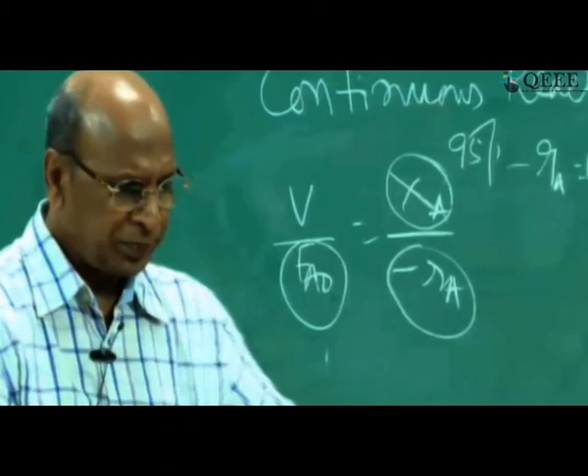Okay, Dr. Manoharan? Beulah madam. Okay, whether the activation energy is constant for a reaction, is it very, yeah.

This is a problem because normally when the reaction is taking place, we fix the range of temperature, and sometimes for some reactions, depending on elementary or non-elementary, activation energy may also change. But most reactions within that narrow range have constant activation energy. But that has to be experimentally determined, and when you are doing it over a long range of temperatures, it is a different matter - you have to carefully do it. Most of the time in reactor design, we fix our temperature range, so within that range you always have constant activation energy. If activation energy is changing with temperature, it is hell for us to design, very difficult. Fortunately it won't change that much within a short range of temperature.

Yeah, what is that? Sir, you said order of reaction is an experimental quantity, can it be determined for any type of reaction? Yeah, it has to be determined for any type of reaction, there is no other way, it is empirical.